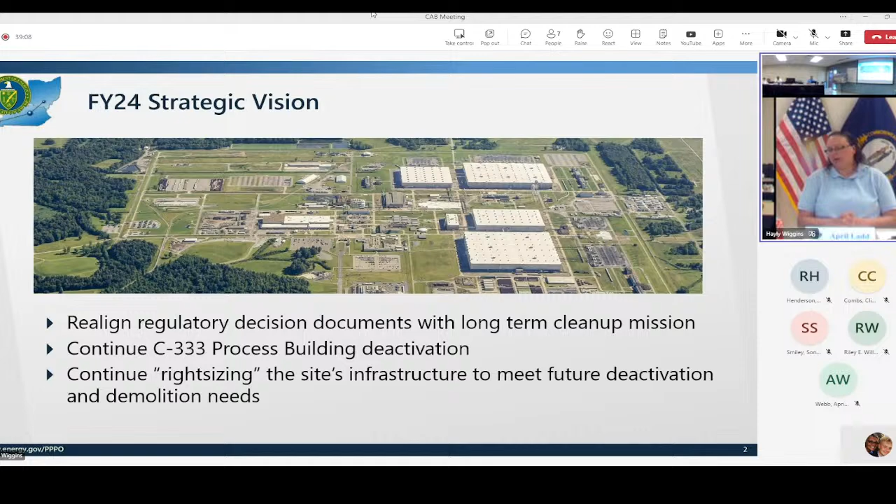So we'll go to the next slide, and it kind of shows you a pictorial of what we previously had, which was about 51 decision documents, really focused on a lot of individual facilities, a lot of individual media types, a lot of individual avenues associated with the cleanup.

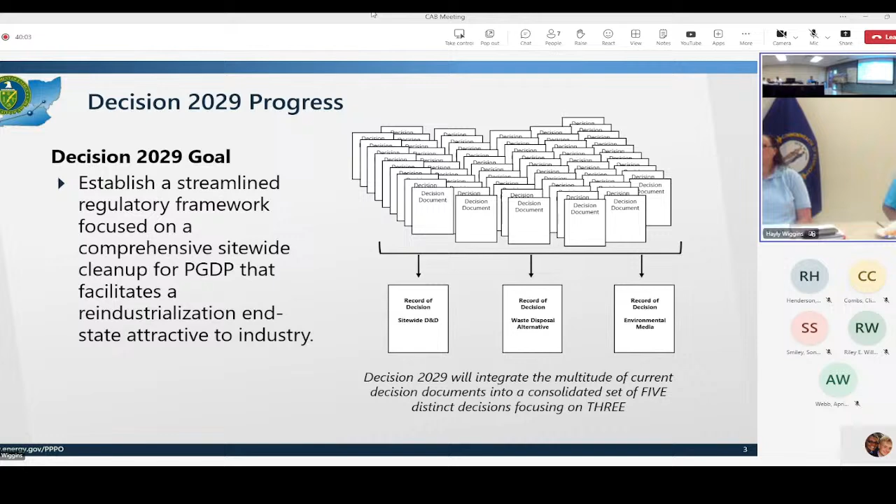So very similar to Portsmouth, they had 5 in total, but we're really focused on 3 of the main ones: a decision on D&D of the site, a decision on waste disposal alternatives, and a decision on how we go about remediating the environmental media. Environmental media is like soil, groundwater, ditches, lagoons, things like that.

One thing to point out is, we've had a huge focus on C400, and we got to the FS stage - feasibility study - with that project remediation. Got to that stage, and when you started looking at the cost associated with the project, a large portion of the cost was in waste disposition.

So after 12 years, they got a ROD signed and they're moving forward with their cell. So we put ours on the back burner, and I think a mix between that and the DOE taking the site back over from USEC is really what caused those 51 documents. And then when we started doing the C400 remediation project and looked at the feasibility study, approximately $160 million was going to go to ship waste offsite - soil, building debris, things like that associated with the remediation of the project.

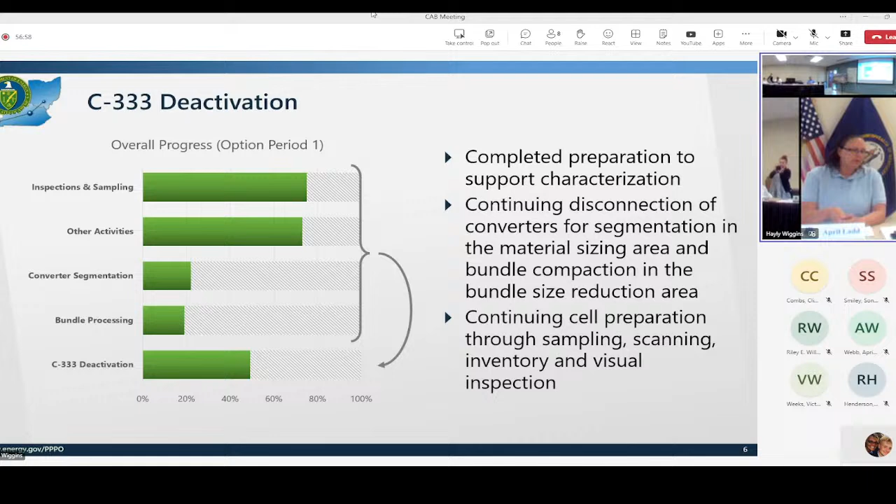And then converter segmentation. If you remember from one of the previous presentations, the converter is on the cell floor, second floor of the 33 building, and we have a material sizing area. The converter's cut out of the cell from where it's currently located, and then a crane takes it over to the material sizing area. And in that material sizing area, we cut the ends off, and then we cut it horizontally to make two halves. We pull the two bundles out.

Then the bundle's wrapped, and the crane takes it and drops it down into the truck alley on a trailer, and the tow truck takes it over to the Large Item Neutron Assay System, LINAS, and it gets NDA measurement, non-destructive assay measurement. That's a characterization tool to help us know, like, material, how much uranium, how much holdup, how much radioactivity it has.

Then it goes over to the bundle size reduction facility, and essentially we take the round bundle and smash it into a square. Can't really make it a square, a round to a square, but our storage container is a square, so we take the round bundle and bend the edges so it can fit into a high cube container, which is the storage box. Then we take the storage box over to a gravel laydown yard, and that's where it'll be stored.

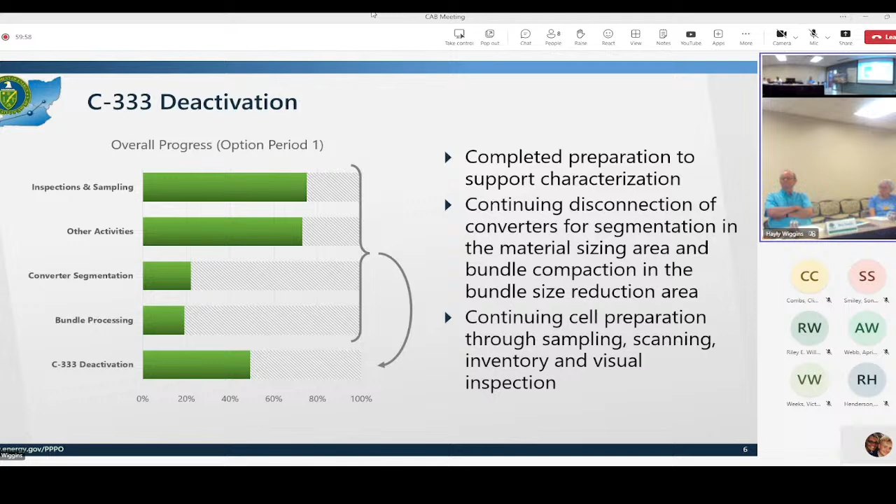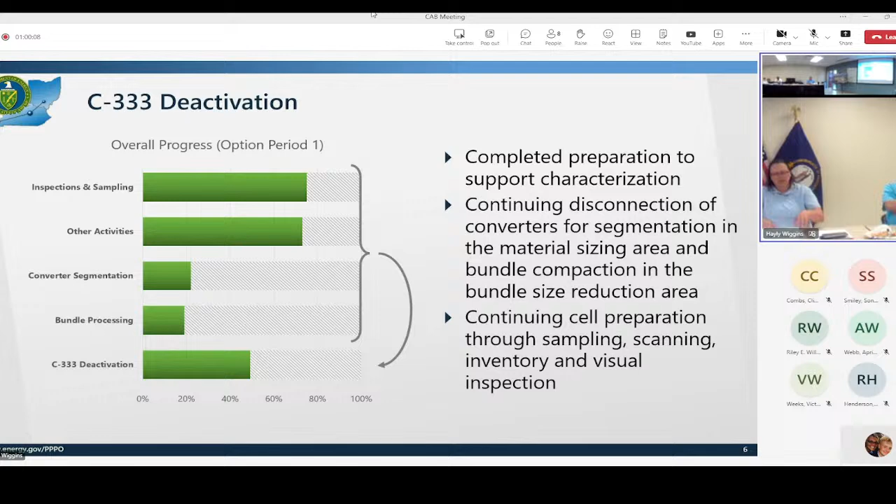There's asbestos housing panels, because when the plant was in operation, you wanted to keep all your heat in to keep the UF6 as a gas. So everything's enclosed in panels and heat trace and different things to make sure that during operating it stayed as a gas and didn't freeze out, because UF6 is very interesting in that it has a triple point and can be solid, liquid, or gas at different temperatures. So it's very important to try to keep heat in and keep it in the gas phase during operation.

For characterization, on the unit bypass, I think about 5,600 panels were removed to be able to access the piping, to even insert the robot pipe crawler, and we have some pictures coming up on that. All the cell housings had to be removed—they're asbestos trim-back panels. All of this is prepped to support being able to do those visual inspections, to be able to do NDA techniques, to quantify material that's in the piping and equipment upstairs that was used for the GDP process.

So we'll go to the next slide.

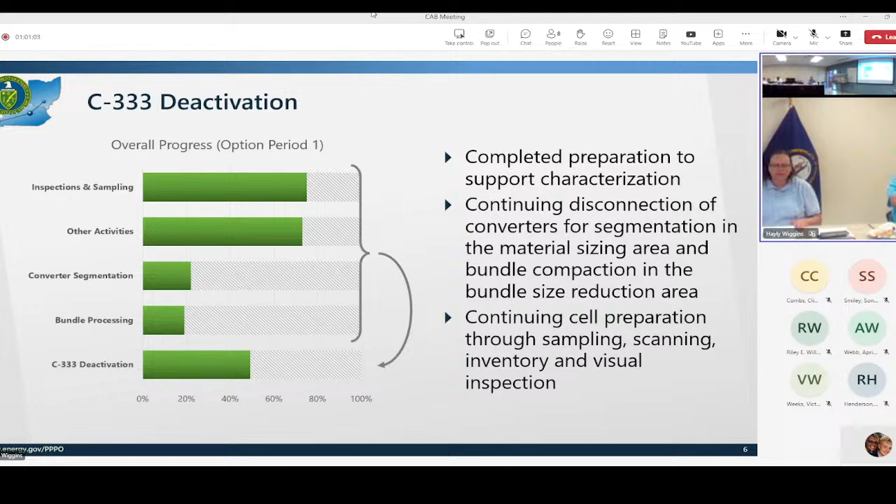We've completed characterization of the surge drums in the 33 facility. The surge drums are essentially big vessels, containers that during operation you're able to put product down into those drums. So if the power company called and said, hey, we're going to drop your load because we've got cool residential homes, you guys need to shut down some cells and take some cells offline, they would take the product and put it in the surge drums and reduce the power need by the plant. A lot of times the plant did maintenance during the summer because we would lower our megawatt usage by taking cells out to maintain and repair things.

And so the commercial electrical provider was able to provide additional heating and cooling, providing additional cooling when it was in the upper 90s, hundreds, whatever outside. So a lot of the operation ran like full blast in the winter, and power was a little cheaper. And so running full blast in the winter meant you had to keep everything warm because you didn't want things freezing out. So again, back to all the panels.

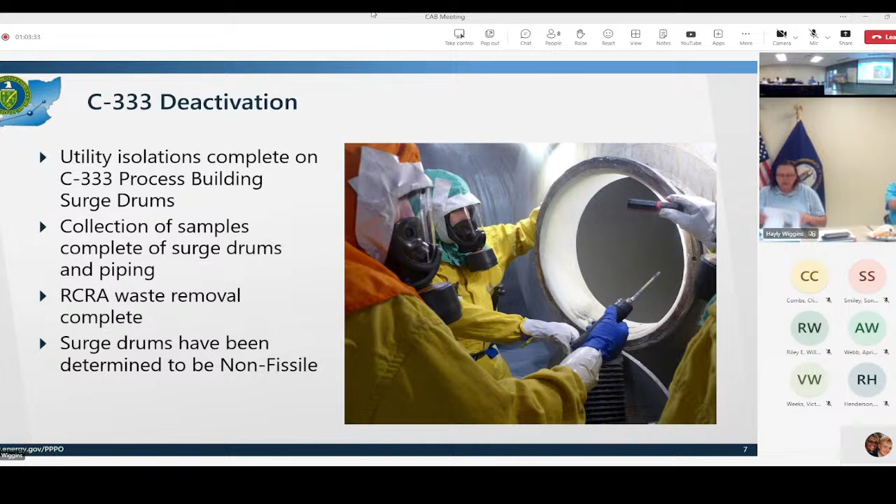As I mentioned, there was like 5,600 panels. There's over 3 miles of process gas piping. The unit bypass connected all the cells. So there were headers to valve the process, pull a cell off, pull one on, take off, valve different ways. That's one difference about Paducah than Portsmouth. Portsmouth ran in series - it went in here, came out here, and just went in a straight line.

So Paducah's more like an accordion. It would shrink and expand based on the customer's need. So you may have half of a building low assay, another half high assay. When you had your 1,720 stages all in a line, you could get to your 5.5% enrichment. The more you had in line, the higher the assay. And it was just a lot of...

...configurations for Paducah. Because we started out with the lower cascade, which was these two buildings right here. So this is the 33 building - it's a triple-lot building, has the larger equipment. This is 31, a double-lot building, has smaller equipment. This is 310, the product withdrawal. And then 315, this is the tails withdrawal.

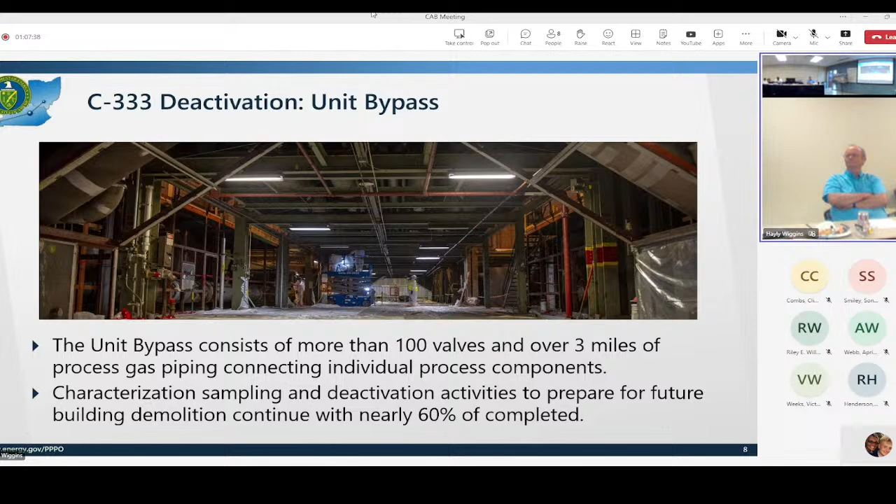So the unit bypass characterization is about 60% complete. We anticipate finishing up the other 40% probably next fiscal year, just because of the amount of work it takes to characterize all that piping, valves, and interconnectivity. We'll go to the next one, and this slide's just some pictures.

So if you were to see some material, you have the sodium iodide scanner to help quantify or help you know what kind of material is there.

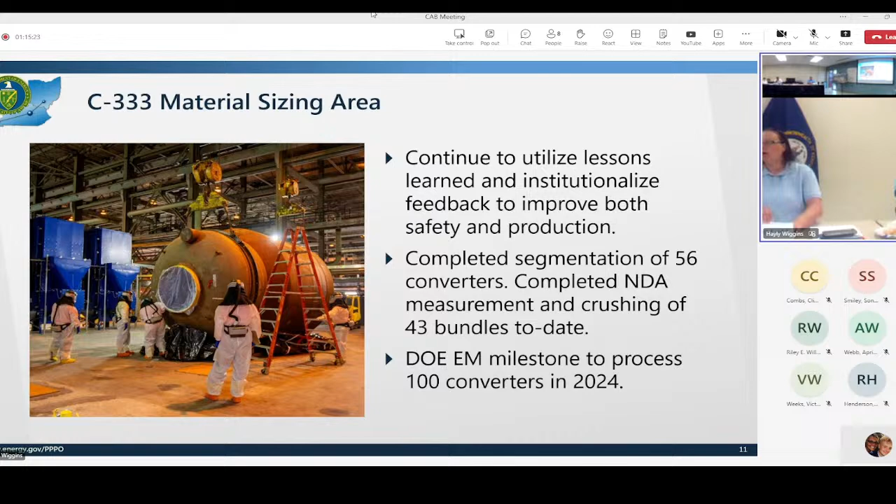How big is that shell? I'm not really sure, but I know it's pretty thick. I'll get you that information. I would hate to guess, but it takes probably about 30 to 45 minutes to cut one of those end caps off, just one. And then it takes a pretty good while to cut it horizontally as well. So plasma cutting is really the slow part of the whole process.

So here we've got some workers adjusting the roller stand. You can see the roller right here. The converter sits down on this and it slowly rotates while we have a stationary plasma cutter, cutting as it rotates. We've added a second one on the other side to help gain some efficiencies and speed the process up a little bit. Here, this is the end cap hoisted and being moved out.

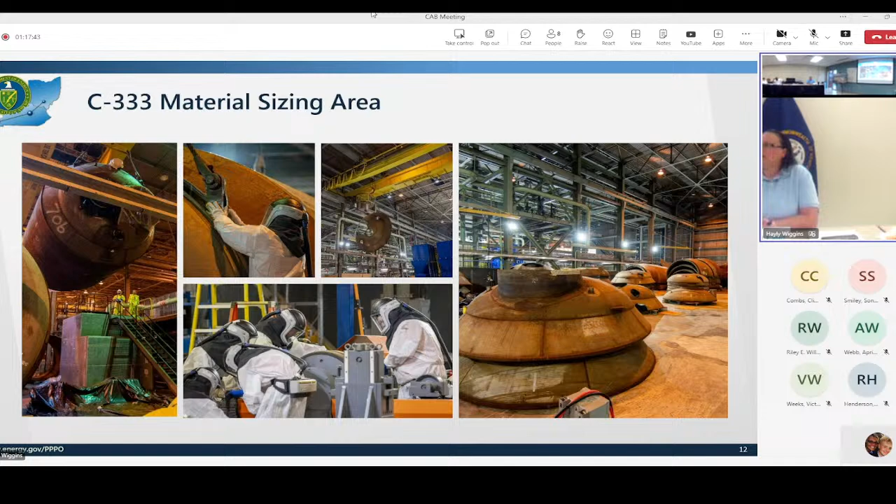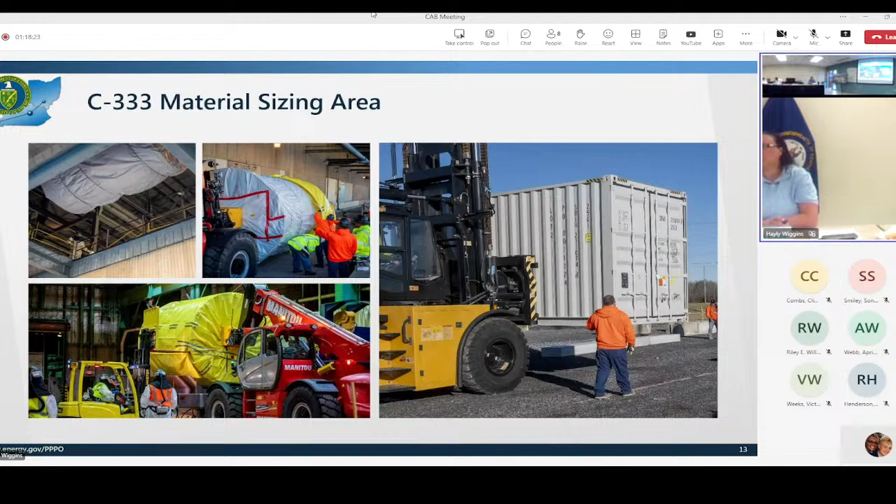So I mentioned it multiple times, we've sent our workers, union workers, work control planners, we've sent our folks to Portsmouth. Portsmouth has sent their folks to Paducah. When we went to cut our first one, we had Ports folks here that had cut theirs, giving our workers tips on exactly how to position the plasma torch so the slag goes away from the converter and away from the bundle, really working with them on how to slowly move the plasma torch and not just sit in one spot and continue to burn and burn through.

Because, you know, I think they were on converter 36 or 40 when they had an exothermic reaction. The nickel with the slag can create an exothermic reaction, and when that happens you have to pretty much just evacuate and let it burn out. So we really worked hard on emergency management and what the protocol is if that were to happen. Oak Ridge shared all their lessons with Portsmouth, and Portsmouth has shared with us, and we really worked hard to implement all the lessons learned and do the knowledge share.

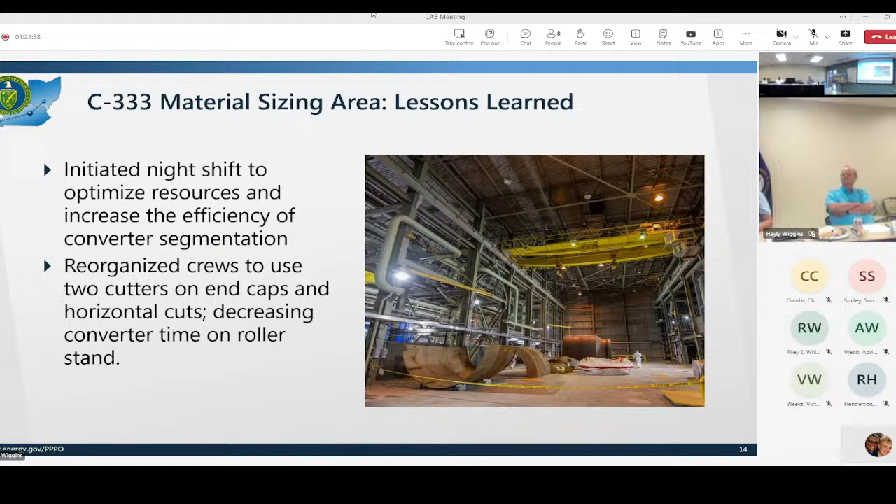Any questions on MSA, material sizing, segmentation, NDA, characterization for the 33 process building? All right, we'll go to the next slide.

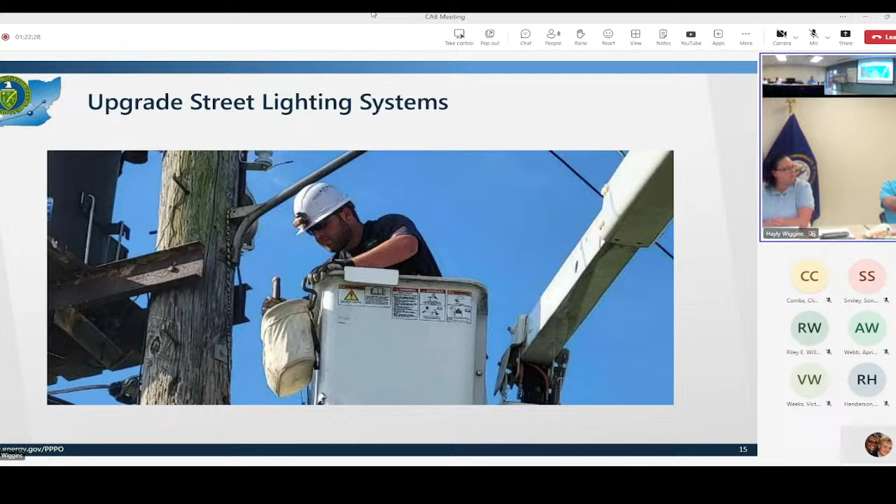So the remaining slides just highlight projects we wanted to go over. We took a great effort as part of sustainability to upgrade all of our street lighting systems to LED, and we've completed the final phase of that. It's been ongoing for more than a couple years, and Swift and Staley had that effort to do the conversion on the street lighting. We are 100% complete with all street lighting converted over to LED, and we're able to up our sustainability goals and percentages for energy efficiency by doing that.

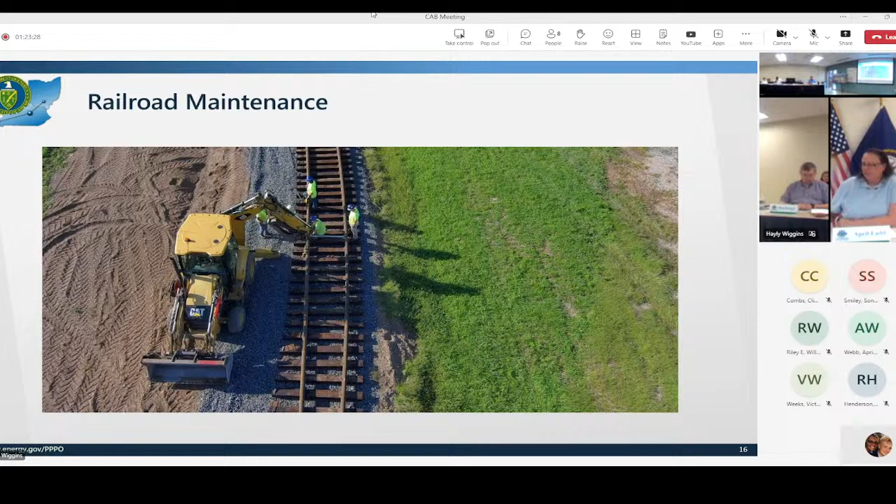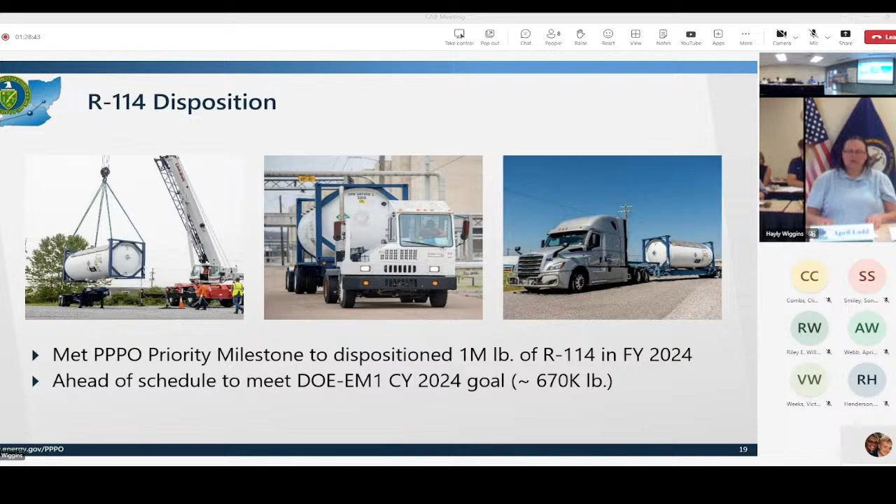Next was footprint reduction, facility demolitions we've done this fiscal year. I think we had 11 or so planned, and we've got one more left to do, which just needs load out of waste.

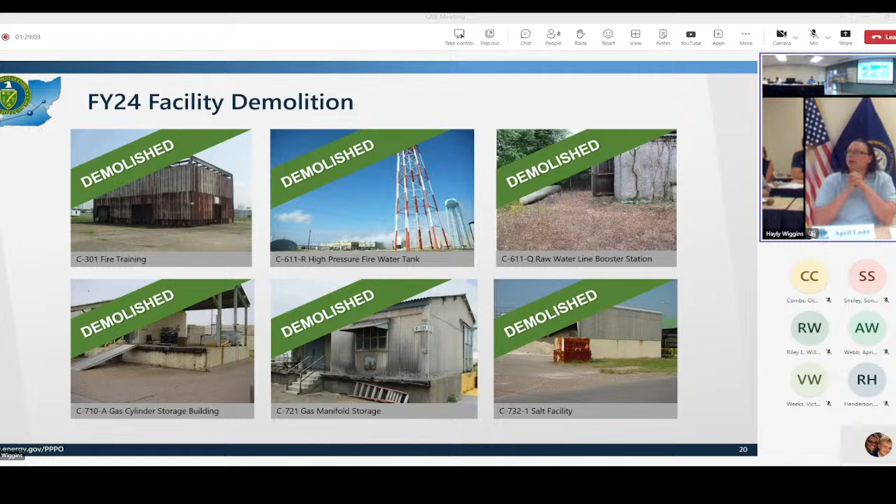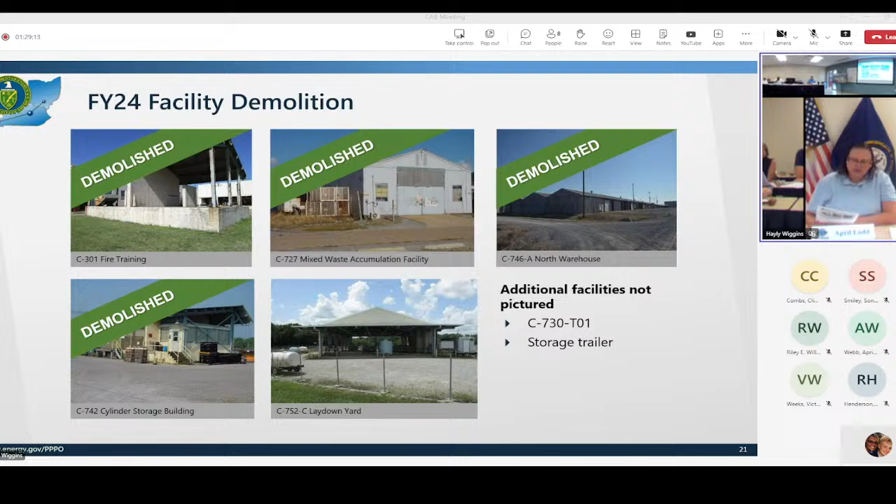I'm not going to go through each one, but the most notable are the 611R high pressure fire water tower, which we have a video to show you guys, along with the 727 facility and 746A - some higher square foot facilities that have been demolished.

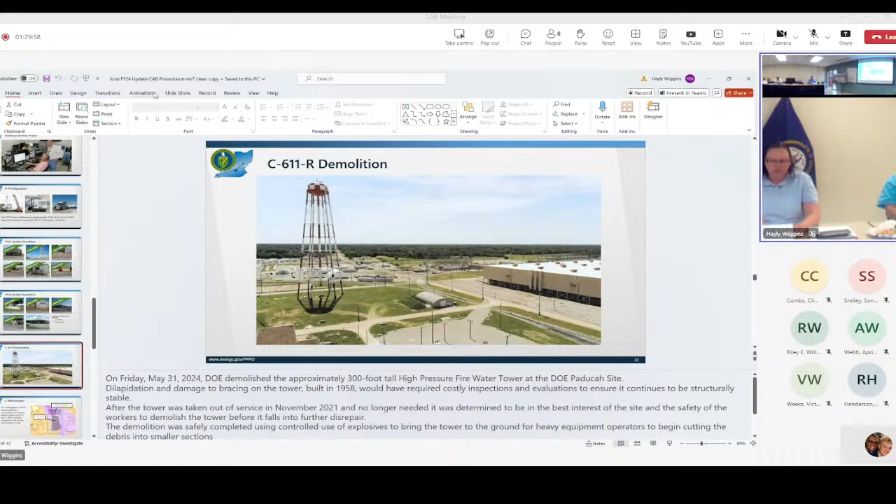The one picture not shown as already green will go green once the waste is loaded out - they're downsizing the waste. Once the water trailers and the sea lands are downsized, the 752C laydown yard cleanup will be green. That's the only one, and it's slated to be done for sure by the end of the fiscal year.

So for the 611R demolition, we'll play the video. We demoed it on Friday, May 31st. It was approximately 300 feet tall, our tallest point at the site. I actually Googled it because I'd always heard it was the tallest one in the United States or close to it. Everything I found was towers with the tallest at 260 feet - I didn't find anything close to ours. I think that could have been the tallest in the United States.

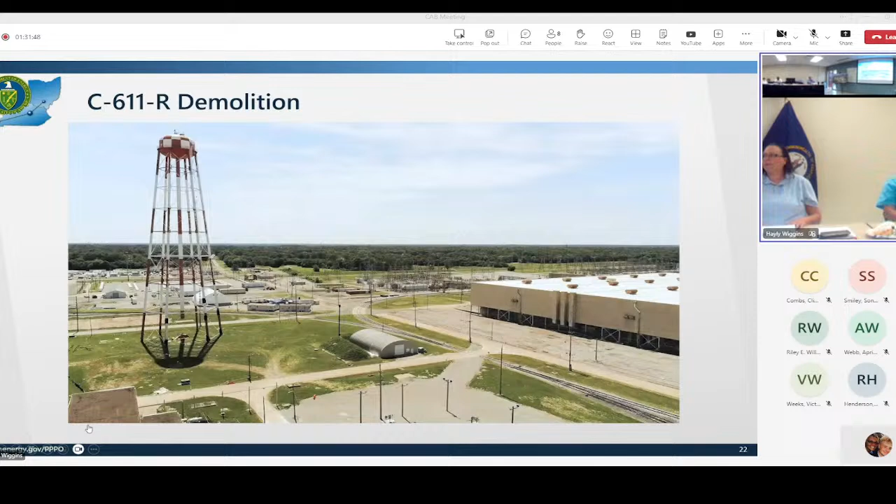It was taken out of service in November of 2021. We did an upgrade on the high pressure fire water systems inside the process facilities to convert from wet suppression to dry suppression - so instead of going off a flow trigger, it now goes off a pressure trigger. Once we no longer needed the tower, it was a good time to take it down before it degraded to the point where it's potentially unsafe. The typical mechanism for demolition of these types of towers is explosion using explosives, and you don't want to let it get so degraded that you can't use that method safely - there's a pretty critical window you have to stay within so it doesn't set too long and get too degraded.

So we'll play the video, and it's pretty awesome - we got to be out there and witness it and watch it.

It's stubborn, let me get it to play on the screen.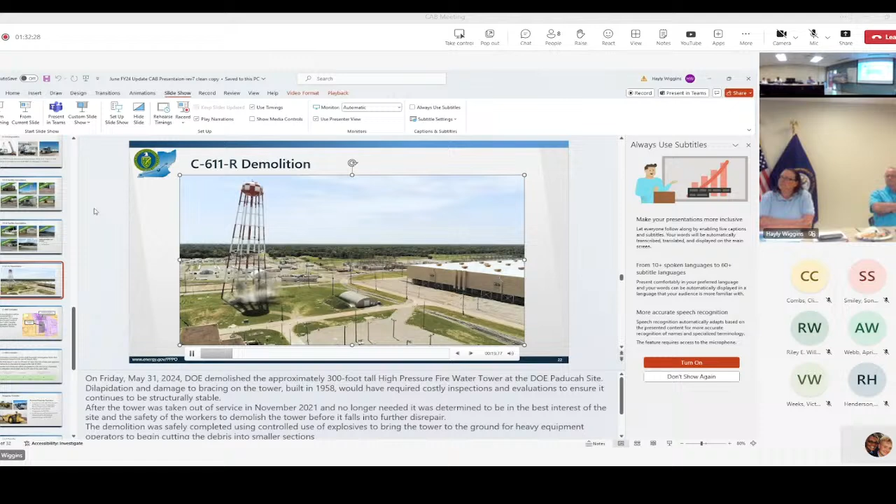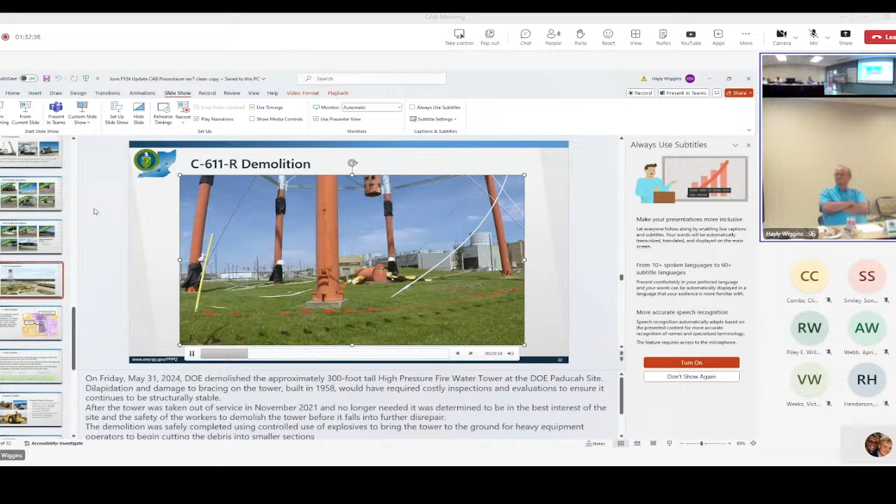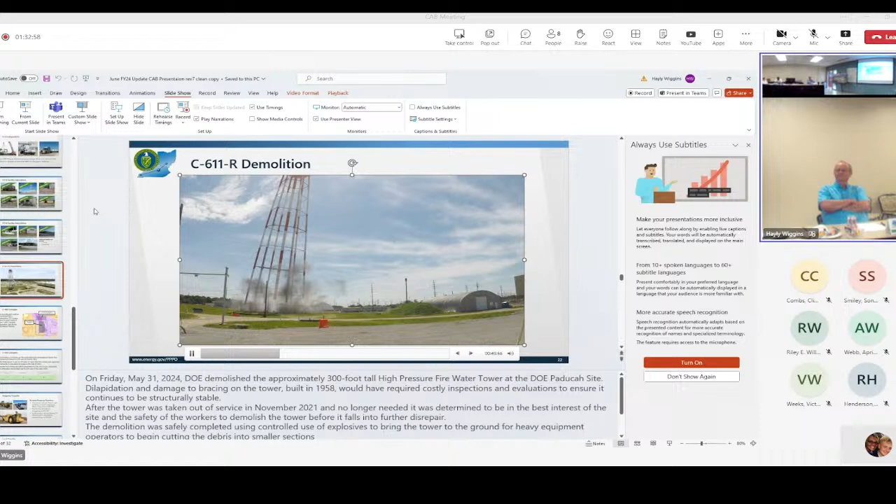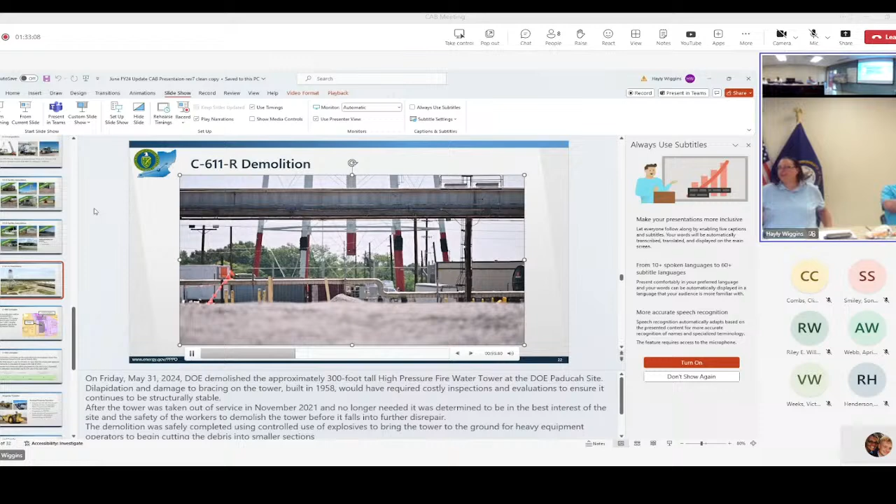I will say it fell exactly where they had planned, and they even accounted for the wind that day - they said, hey, I need 2 more sticks of dynamite on this leg, hey I need this over here. It was pretty impressive and amazing to hear the radio chatter from the guys setting up the explosives. You can see we bermed this little Quonset hut, and I don't think that berm would have stopped that big tower at all - it would have been a pancake if they had missed their target. Everything went as planned.

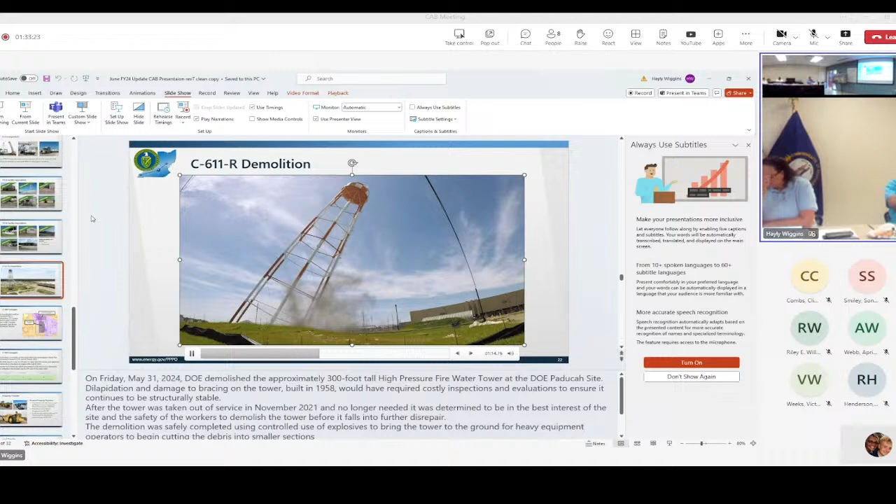Now the crew and team are working on downsizing the legs and the tower. But it was really pretty amazing. That's some really good footage too. It is.

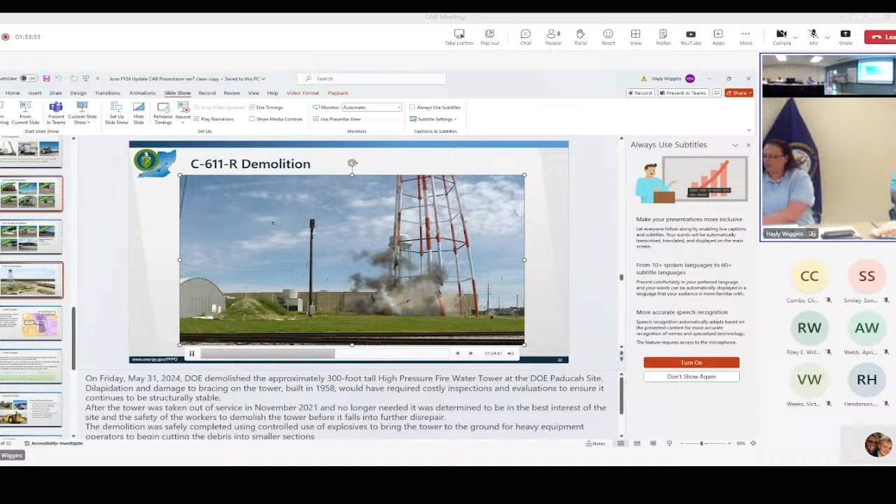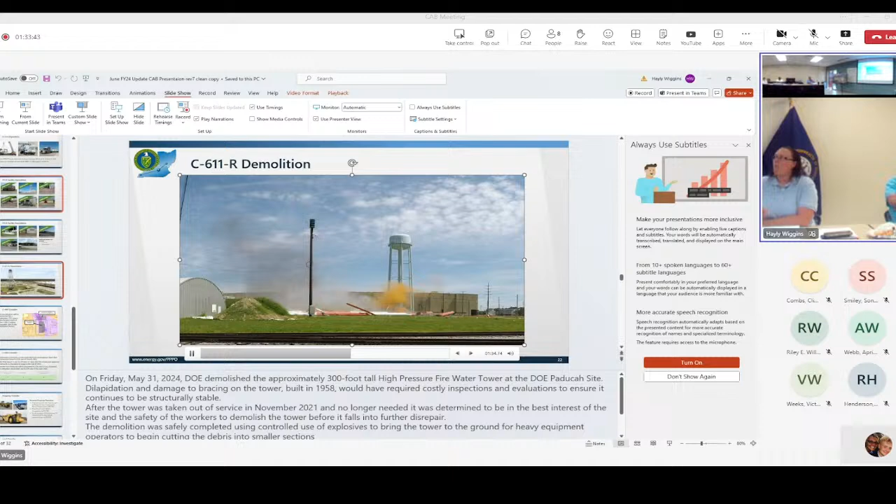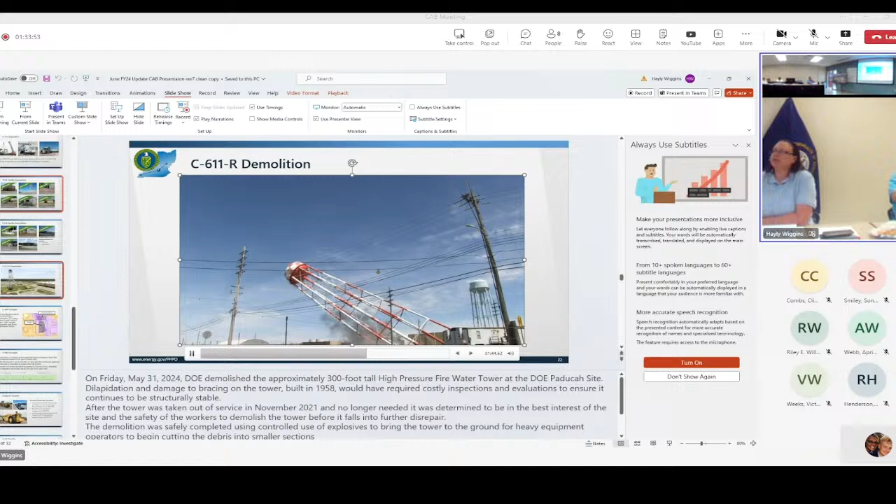You can see that there were selected legs that blew out to make it lean that way, and it just fell over that way to get it to where they wanted it.

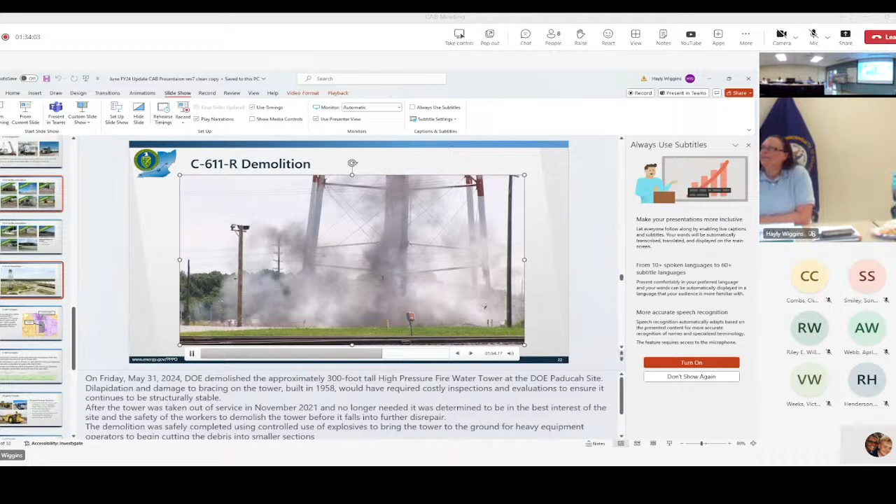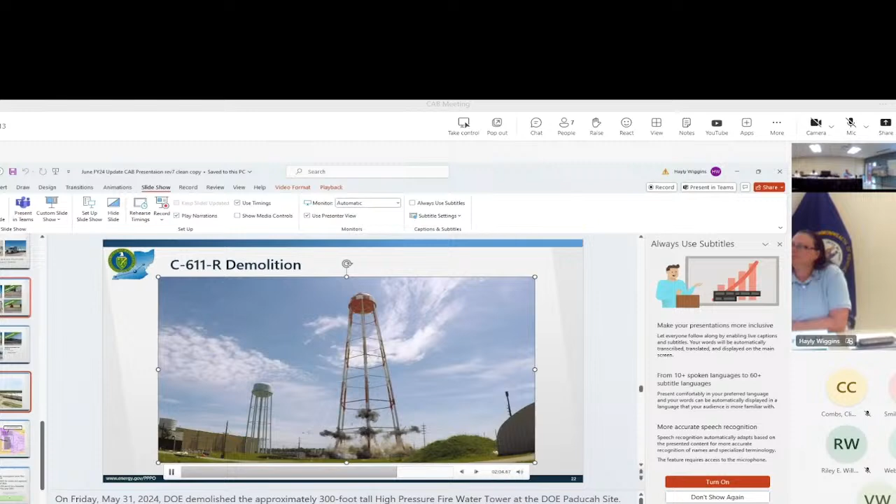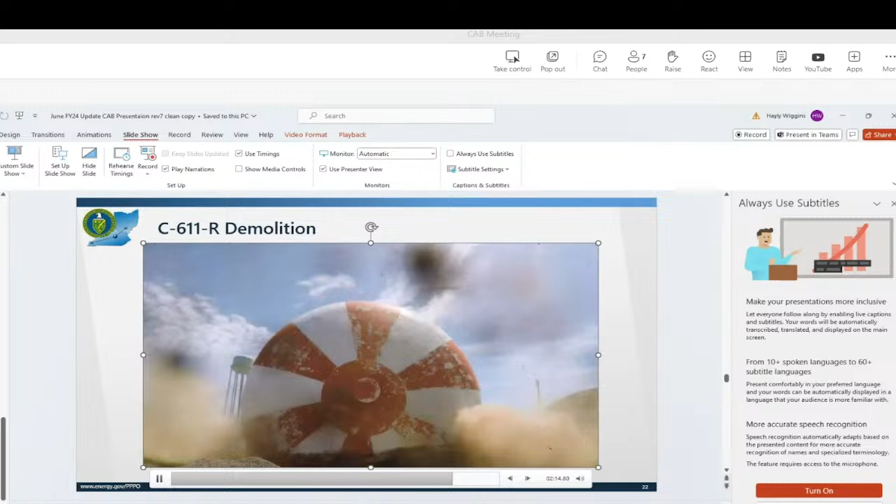That's pretty good. We were expecting to lose the camera on that one. Explosive operations are all clear. Right to the drop of where they had said. Pretty amazing.

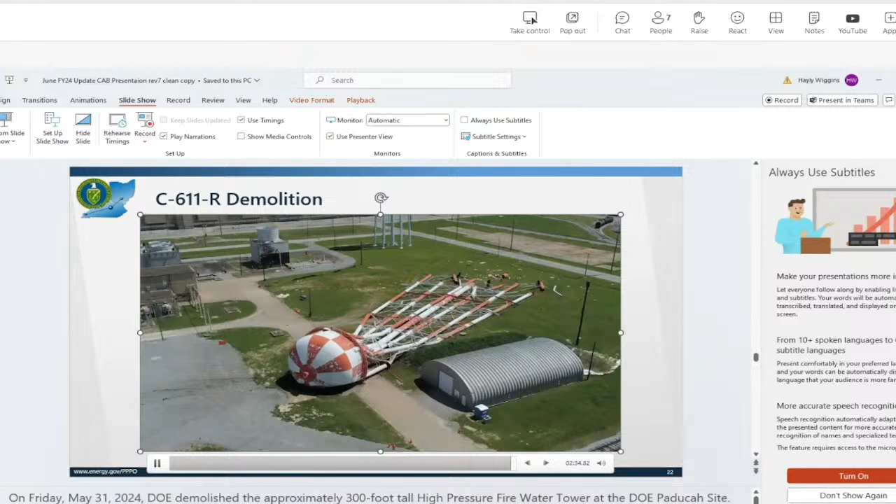It's kind of like a jellyfish.

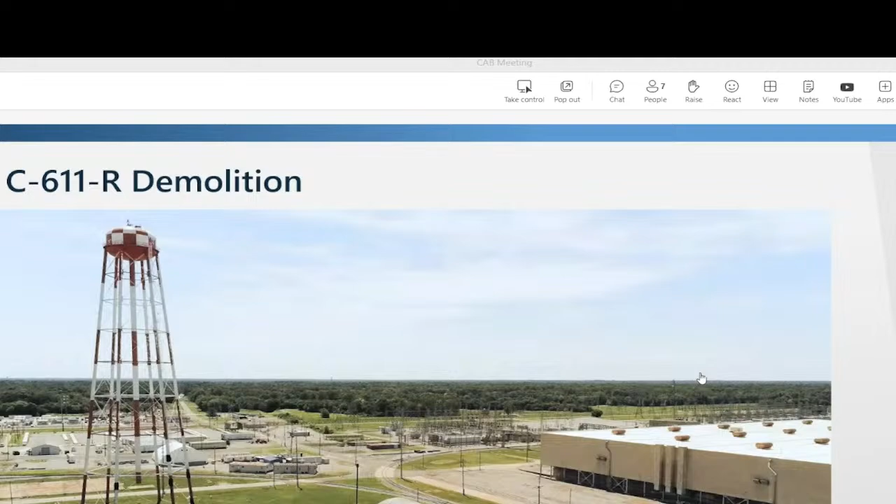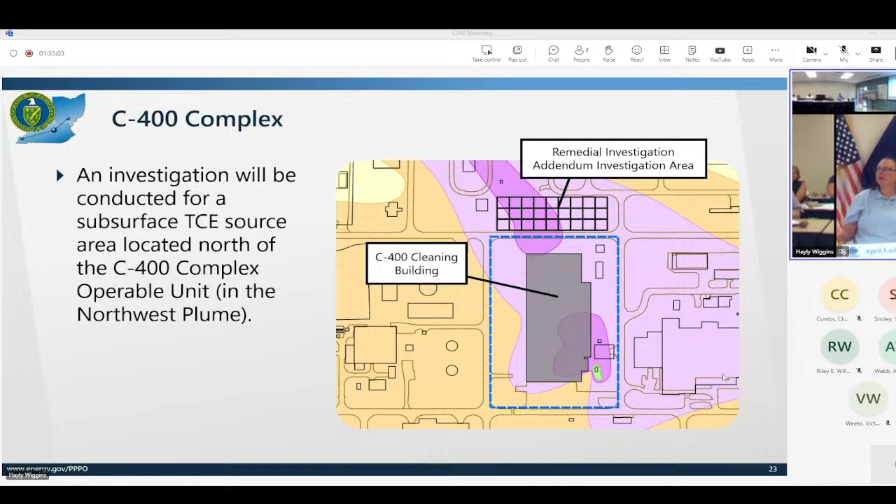As Gay was mentioning earlier, what are you going to continue to work on at 400? We just submitted the work plan addendum so we can go sample north of 400 to get a better idea about the concentration here, for placement of a new groundwater well closer to 400 so we can continue to pull that source material back to the source area on the southeast corner.

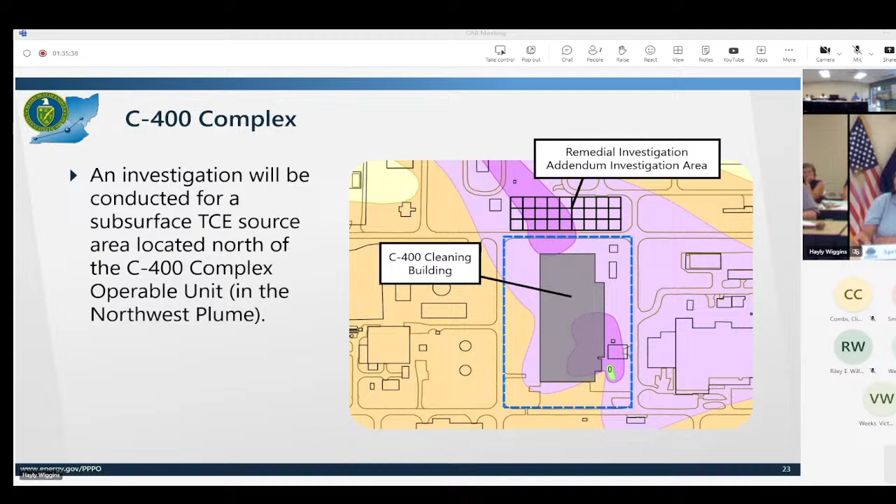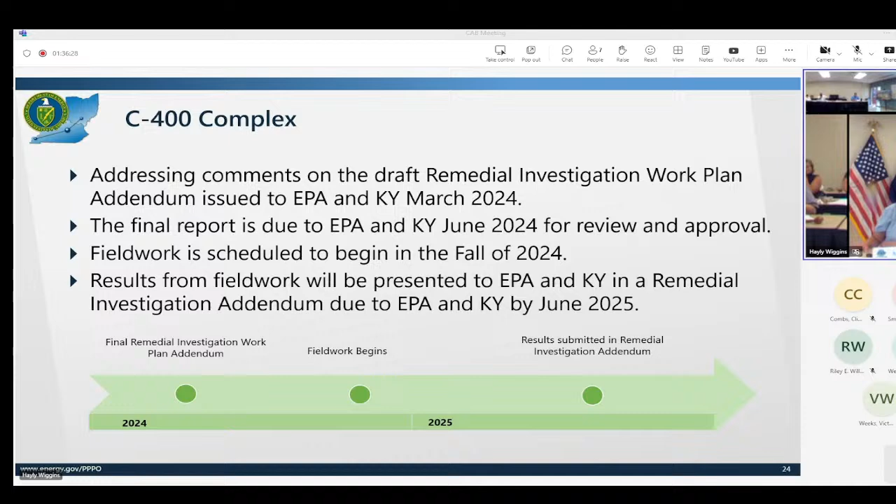For property transfer, we try to make sure the contractors are always thinking about things that could potentially be reused, obviously if it meets the free release requirements. We were able to free-release a couple pieces of equipment and some trailers. These trailers are used to haul the Eurotainers, the isotainers for the R114. We replaced 10 of those trailers, just from wear and tear trucking the R114 to the vendor and back and forth for the shipments we've already done. It was time to replace some, so we replaced 10.

Those will go to PACRO, probably to be scrapped or recycled. We continue to look wherever we can to provide items to PACRO for reuse, also including that 90-pound rail mentioned earlier. We've got everything lined up, and it'll be going to PACRO as well. It took a little coordination, but we're going to be able to give it to them.

There's an interesting story about how we worked out a way to get that loaded, it was a real challenge. Swift had the job to replace the rail, and we already had all the RAD surveys done, but with their fixed price contract, they didn't have pricing to get rid of it. So we ended up working with FRNP and their management team and waste operations team, and with Swift and Staley, to have their heavy equipment operators go load the 90-pound rail onto the PACRO trailers, because really that's all that needed to be done, just getting it loaded.

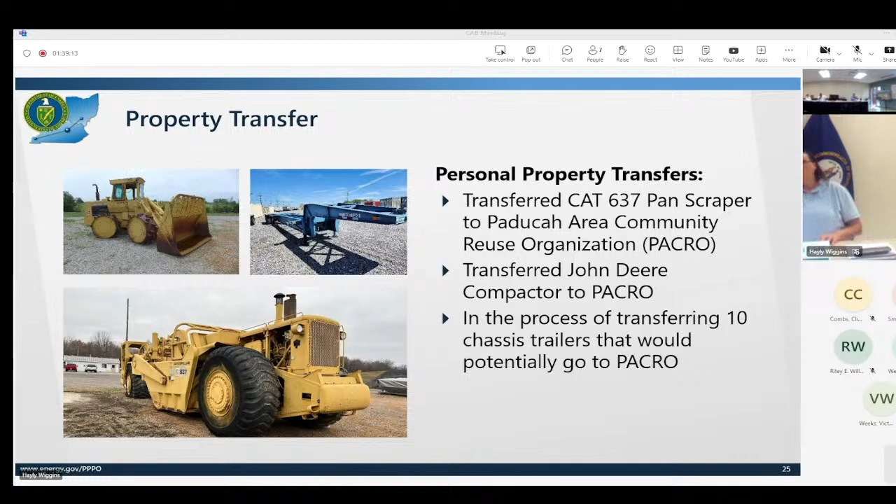So we got that worked out and saved a lot of money. Swift had quoted about $200,000 to load it out, but it was labor FRNP already had on contract with their cost-plus award fee contract, they get paid for that labor already. So those waste operations heavy equipment operators just went and loaded it out that day. It was a win-win for everybody to work that out.

Are they able to recycle that rail, or reuse it? I don't know if they'll reuse it, but it'll probably go to the scrap metal, to Three Rivers Recycling. I didn't know if it had any value, I think because it's light duty rail, it's really not standard anymore.

Along the lines of PACRO and property transfer, we actually got a real property request from the community, requesting approximately 250 acres of land on the east side of the plant, kind of over on this side.

For Portsmouth, as an idea, their first parcel transfer took about 18 months. Paducah is very similar but different from Portsmouth in that Paducah is on the National Priority List, so we'll have some additional hoops to go through to transfer our property. But getting the request and getting started on it will help us get through those hurdles much easier. Once we get through the first one and the process gets ironed out, we'll be able to speed up and become more efficient each time.

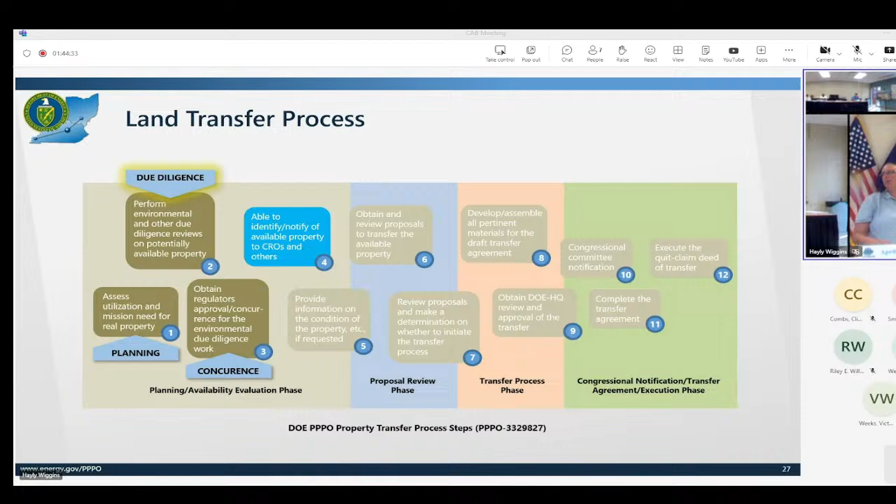Low-level waste disposal facility federal review group. That's it, that's it, Federal Review Group, that's all I know. Yeah, there you go. So anyway, it's a very onerous process to get it through that group, to get their blessing so it can move to the next step. Obviously, that group has to give it the blessing before it goes to headquarters, so headquarters can say, okay, we know our SMEs have looked at this and we feel good that we can transfer this. So, all part of the process.

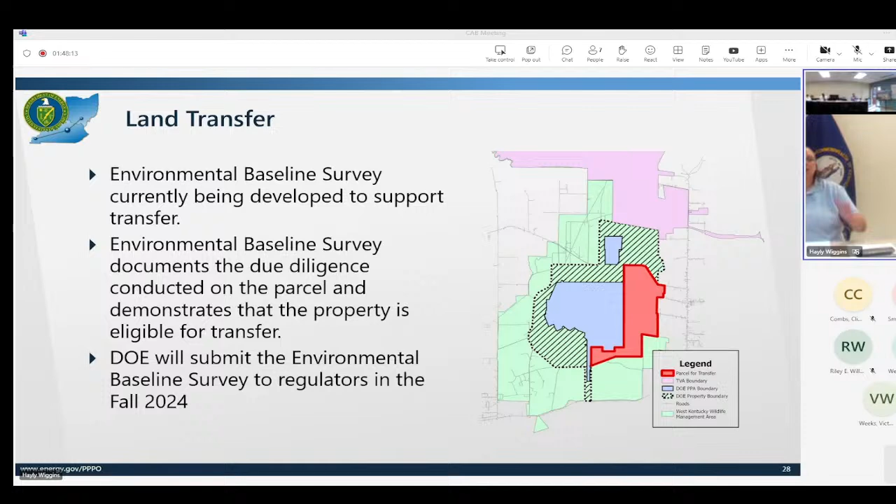Okay, next slide. Any questions on any of those miscellaneous activities and things going on?

So we'll talk about DUF6 a little bit, about what all they have going on. The DUF6 contractor was a recipient of the Kentucky Governor Safety Award, so wanted to point that out. Safety is obviously our number one focus at the plant.

As Jaden mentioned earlier, the DOE orders, guides and standards are way more strict than OSHA for sure, so we always fall to the most conservative safety limit or factors.

DUF6 has been doing very good on their conversion goals. They've met their September through March goals, which is really good because for the longest time they had some unrealistic milestones and goals on production. So it's really good they have something more realistic and are able to meet those goals and essentially exceed them.

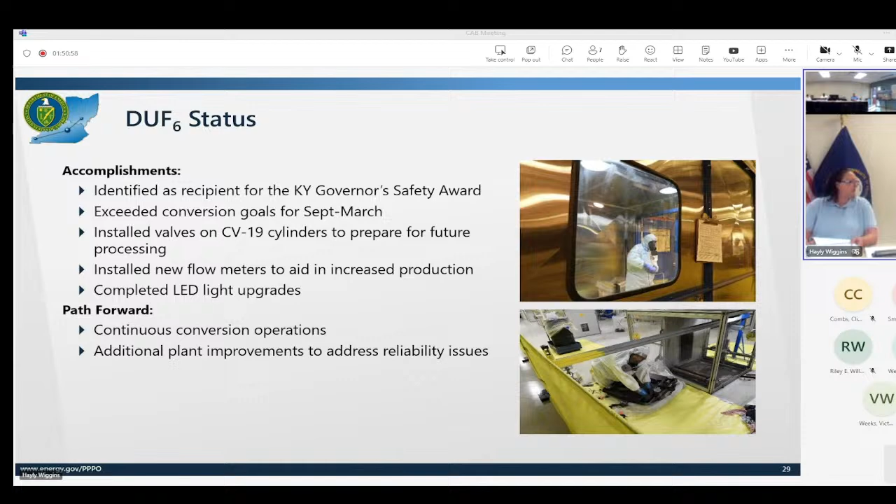So the next slide's on oxide shipping and where we're at on that. This would be the depleted uranium that they put back into the cylinders that they feed. They plan to ship 60 by the end of September, another 60 by December, having shipped 186 total, shipping it to WCS, Waste Control Specialists, in Texas.

You might ask, why not just let that keep processing and put them in the yard? But it's important because you're going to get stovepipes with yard space if you don't process those — right on DUF6 processing hinges the plant cleanup. We can't clean up if we have all these cylinders over here. Those have to either be moved or processed, so it's all contingent on one another.

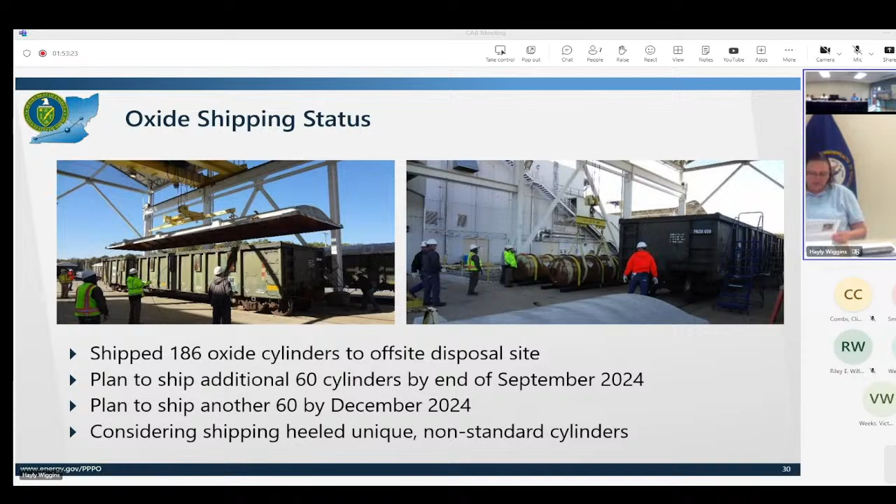Last slide on DUF6 — to help facilitate their oxide shipping, they're looking at a phased approach to standing up a facility dedicated just to help do that. They have been able to ship oxide — I think we shipped 60 cylinders early this fiscal year — and they're able to do it, but it's just not as efficient. So they're looking at a phased approach to building a facility solely focused on oxide shipment.

They've worked on rail space, which is one of the keys, because the gondolas that they put the oxide cylinders in to load up require track space, and it's really congested. They've taken some rail that was previously inactive and done maintenance on it to bring it back up, and even expanded it in length so they'd have space to put more rail cars in. Now they're working on the actual facility and the connection of that facility rail to the rail they put in for the flow-over cars.

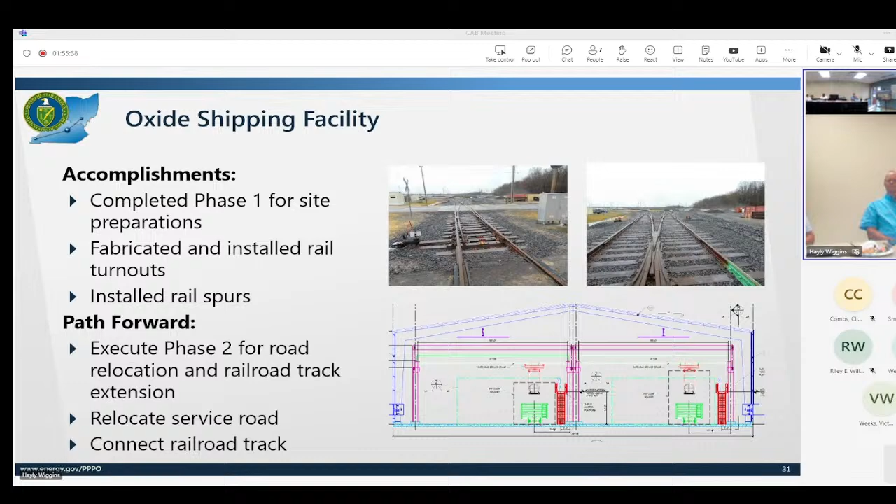I think that's all the slides. Any questions? That was a lot, covering the whole entire site and everything we do all the time, but there's a lot going on at the plant, a ton of work. It's amazing, feels like the most going on in a long while. It seems like it's every day. Everybody's busy running 100 miles an hour, so, any questions?

Hopefully I helped you with acronyms and pointing out things. That always helps. I know we covered a lot, but outside of senior management and project directors, most folks on site are just doing their job.

Legitimately, you guys have as good a scope of what's going on at the site as probably the top 5% of the people in the area. That's a big deal for us, making sure you have a good grasp of what's going on, because of your role in advising DOE, but also as members of the public who can take this message to others and have some semblance of what's going on when these things come up. I wanted you to realize it's a lot of material, but it puts you in fairly elite company knowing everything that's going on to this level of detail.